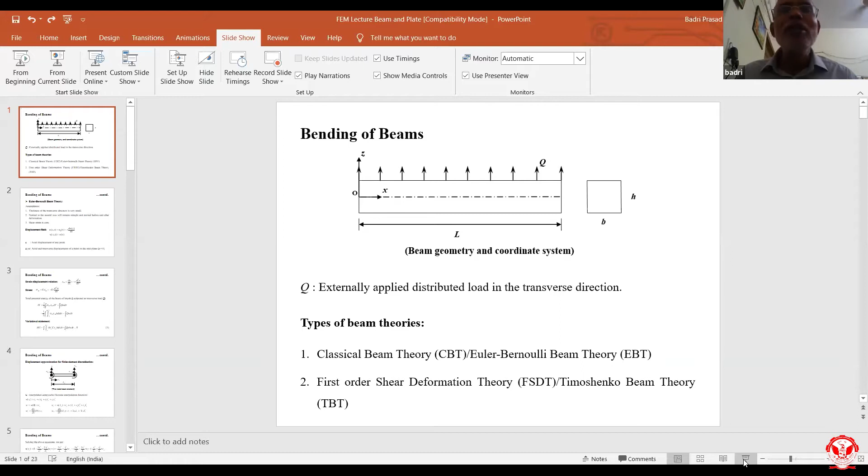Good morning to all the participants. Good morning, sir. I am going to talk about the finite element formulation of beams. That is the main topic I'm going to deliberate on. If you see this slide, my slides are visible. Yes, sir.

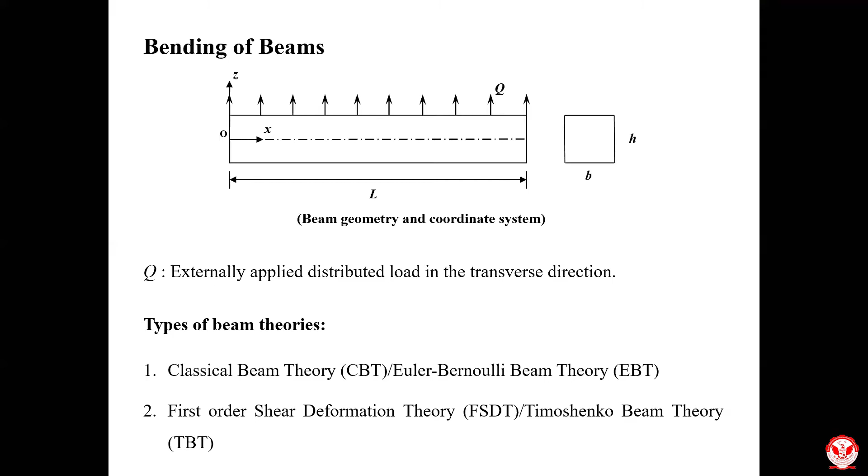What you see here is a beam, and you see the coordinate axes are marked X and Z. The length is L and the cross section shown is rectangular, although the cross section can be of any shape: circular, hollow circular, I section, or triangular. And in the Z direction, this is load Q. So for the finite element formulation of beams, first we need to look at beam theories.

Typically one is classical beam theory, also known as Euler-Bernoulli beam theory. The assumptions of Euler-Bernoulli theory are applicable if the length to cross-sectional height ratio, L by H, shown in the diagram, is greater than 30. In vibration problems, because the beam vibrates in different modes, there is the concept of wavelength. For vibration problems, if the wavelength to thickness ratio is greater than 30, then Euler-Bernoulli beam theory would be applicable.

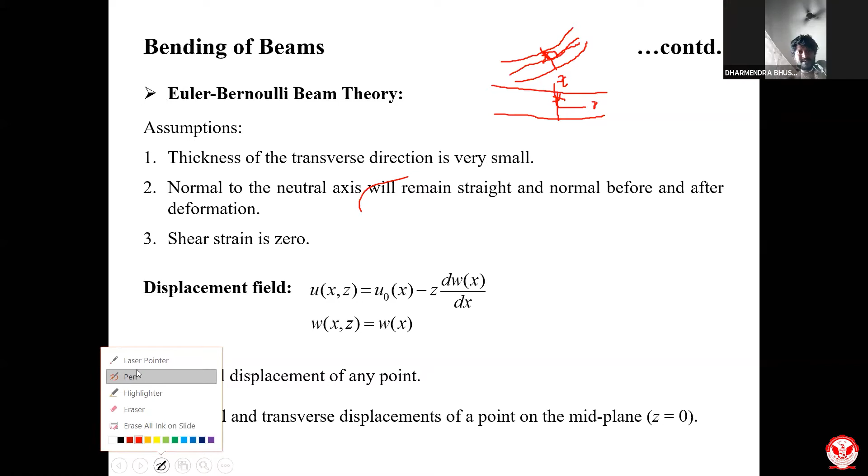Now based on this, if I take any point at a location z, say over here, at a distance z, that point goes to this location. As you see, this point moves along the x direction and also along the z direction. If you see the displacement given here, u(x,z) is equal to u naught of x minus z into dw by dx. What happens is that this line rotates by an angle dw by dx. So the displacement of this line from the center point, if I take this line here, this distance is minus z into dw by dx, because the slope of this line is dw by dx. That is how the displacement along x direction is u naught of x minus z into dw by dx.

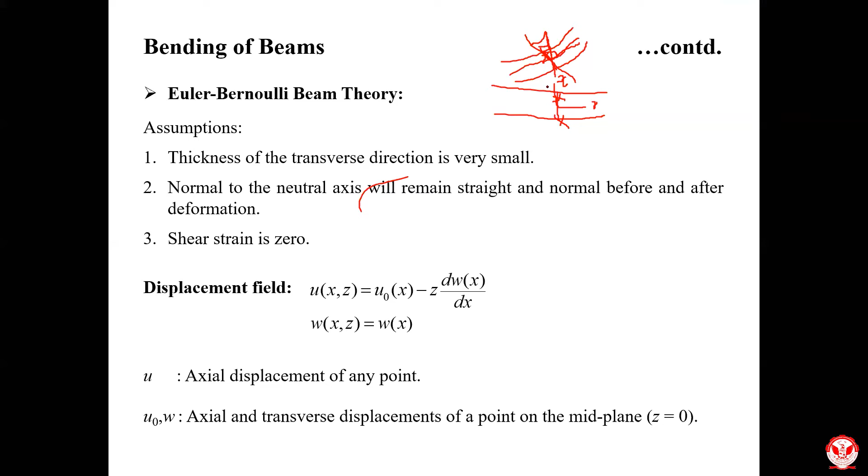Another assumption is about the displacement in the z direction, that is, along the thickness direction. It varies only along x, so if I measure the deflection at the bottom point or at the top point, it remains the same. It is independent of z and is only a function of x. Now another special case is that the beam is subjected to only transverse load, which was shown in this slide. In that case you will find that u naught of x is going to be 0. For small deformations, this point initially is here, and the other point is at the same x location. The x coordinate of the point on the center line does not change. That is how u naught of x would be 0.

Therefore the displacement along x direction would be minus z into dw by dx, and w is the displacement along the z direction, the transverse direction. So u is the displacement along x direction here, and w is the displacement along z direction. As already explained here, u is the axial displacement of any point, and u naught and w are the axial and transverse displacement of the point on the mid plane.

Now the next concept we look at is the strain. If you look at here, it is a one-dimensional problem, so the independent component of strain is only one, that is the normal strain epsilon xx. This strain epsilon xx is, if you take a line element parallel to the x-axis and look at its change in length per unit original length, the gradient of u along x, du by dx. And we have written u as minus z into dw by dx. So epsilon xx comes out as minus z into d2w by dx squared. This is the expression for normal strain in the beam along x direction in terms of transverse displacement w.

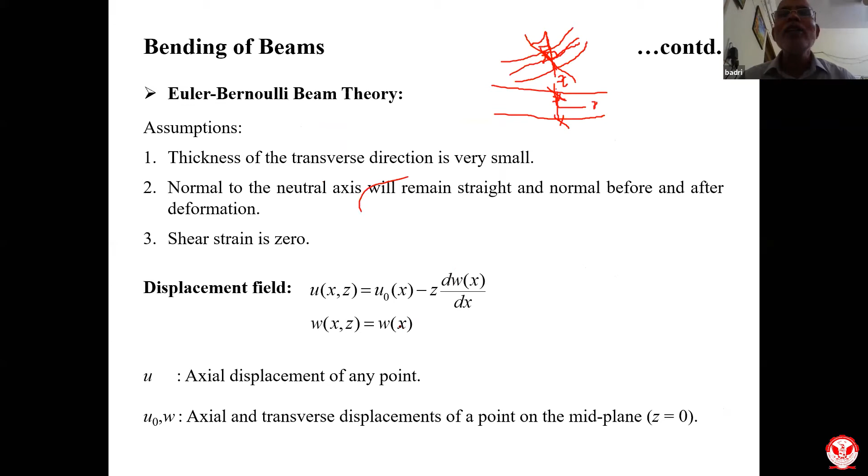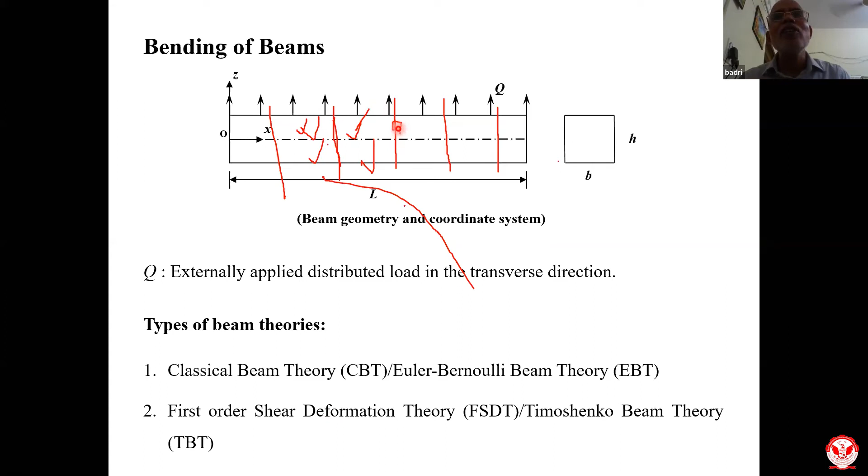Now we do one more thing in this expression. If you substitute epsilon xx as minus z into d2w by dx square and carry out the integration with respect to the thickness coordinate, that is the z coordinate, from minus h by 2 to plus h by 2, you will have a term E z square b dz. So z square is the distance of a differential element from the y axis, and b into dz is the area. So that integration can be written as the second moment of area, that is, the area moment of inertia.

So the expression for total potential energy can be written, when you substitute d2w by dx square as B into d, as follows. The first term is delta of epsilon xx transpose. If you want to take delta of this expression, B is a known quantity, and dE, the vector of elemental degrees of freedom, is an unknown quantity. So its variation would be B into delta d. So if you substitute epsilon xx transpose, you get delta d transpose, and these are the values at node points, so independent of the x coordinate, and can be taken out of the integration sign. So you get here B transpose E into I, the area moment of inertia, into B dx

into dE. You would notice another thing here, that the quantities which are matrices or vectors are denoted by bold letters. If you are writing on a piece of paper, you could use square brackets for enclosing a matrix and curly brackets for vectors. So here bold letters are used. This is the first part, the strain energy part of the total potential energy expression, minus the potential energy of the external forces, equal to 0.

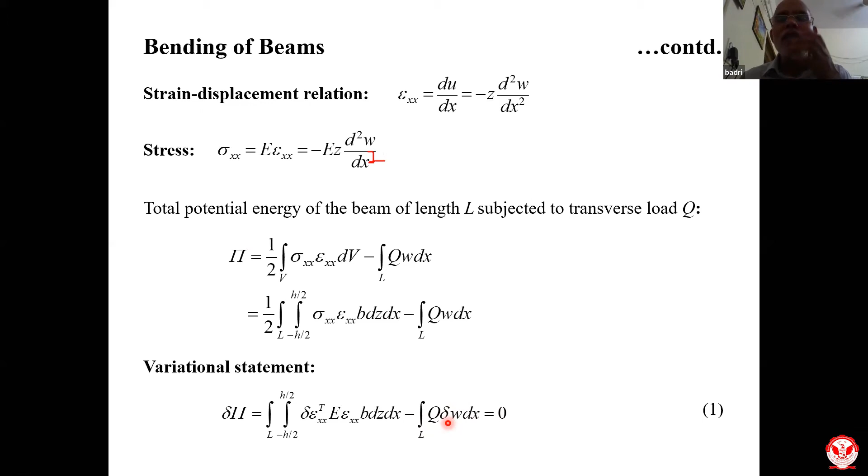So it is equated. The second term, because the whole thing is equal to 0, is taken to the right hand side, and it is q into delta w, and w here is h into dE. So w transpose would be d transpose into h transpose, and when we take delta of that, it would be delta d transpose into h transpose. So that is how this is written as delta d transpose, integration over the length of the element, q is the distributed load, h transpose into dxE.

And now, since delta d is arbitrary, we enforce another condition as per the principle of stationary potential energy. The first variation of the potential energy should be 0 for arbitrary variation in the displacement.

So this is arbitrary. So the coefficient of delta D from the left side and right side must be equal to 0. And that gives you what is known as the element level governing equation, which is written here. So finally you get the element level governing equation as B transpose into EI into B into DXE into D. This is arbitrary, so we are equating its coefficient. So other things remain here. So this whole term is equal to the coefficient of delta D transpose on the right hand side,

so it is equal to this. And now this part, integration 0 to LE B transpose EI B DXE, is known as the element level stiffness matrix, and this integral on the right hand side is denoted as the element level load vector. So are there any questions so far?

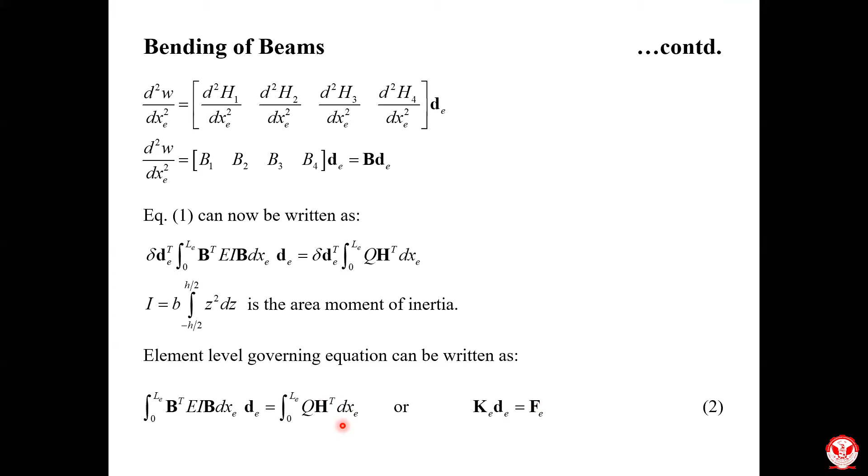Okay. Are there any other questions? Yeah, so if there are no questions, we proceed further.

So ultimately when you are solving problems using beam finite element, the element level governing equation is important. But of course, to understand the assumptions behind that, and what we mean by degrees of freedom and why these degrees of freedom, you need to know this basic theory. Now B is the second derivative of the shape functions h1, h2, h3 and h4. These four shape functions are defined here. So we take the second derivatives of these, and when we take the second derivative, we get this matrix B.

Although I did not tell you another thing, why I denoted this as a matrix and this as a vector. This is a general notation. In more involved problems where there is more than one variable, here there is only one variable W, that is the transverse displacement of the beam. So this is just a row vector. But if there are more unknowns or variables, this will become a rectangular matrix. That is why I have used the notation matrix for this. And irrespective of the problem type, this will always be a column vector. So that is why I have denoted this as a vector.

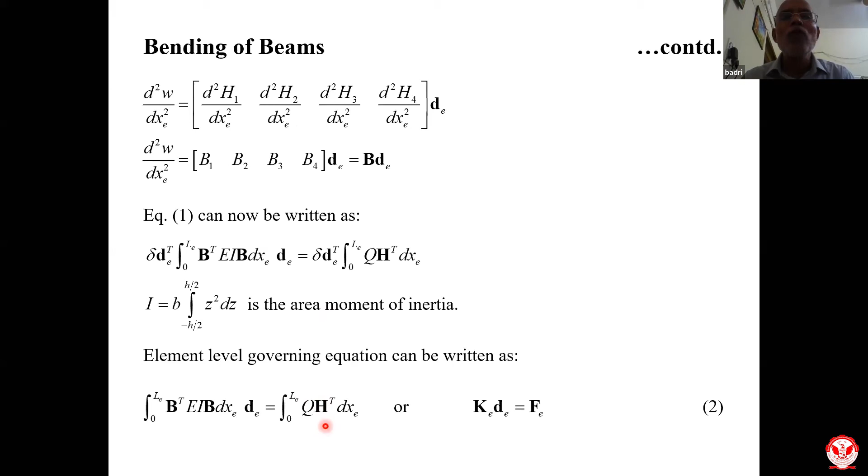Similarly, here H transpose, H was this. This is your H, which in this case is a row vector of size 1 by 4. When you take the transpose, it becomes 4 by 1, and carry out the integration with respect to XE, you will get a vector of 4 by 1, and that is nothing but your FE. So if you carry out these integrations, this is the form of stiffness matrix you get. So a 4 by 4 matrix, EI is outside, that means it is multiplied to all the terms here, like 12 upon LE cube. So after the integration, you get these. These are the elemental degrees of freedom. This side is the load vector. Now you see the load is a transverse load.

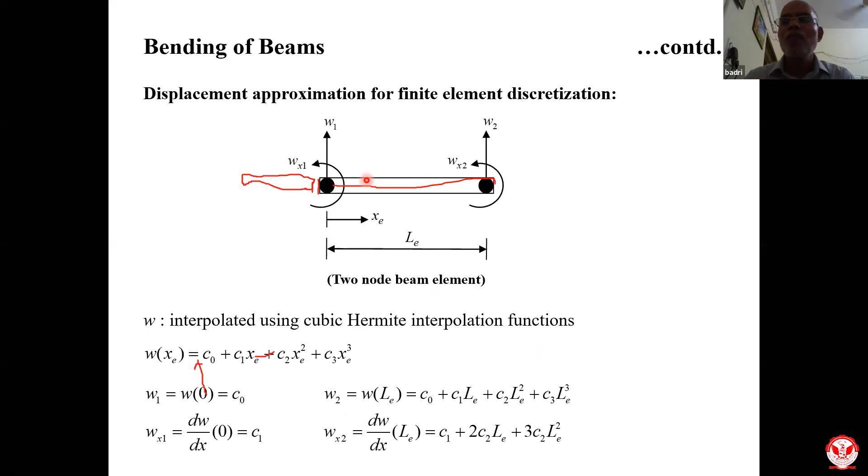So if you look at one beam element, that is this particular beam element, and there is, let's say, a uniformly distributed load on it. The total load acting on this beam is going to be Q times LE. In the load vector FE on the right-hand side, you have Q LE by 2, and the third row is also Q LE by 2. So this is exactly half of the total load acting on the beam.

But because we derived this load vector using the shape functions, we are getting these additional terms. This is actually a moment. Now, from here onwards, for the analysis of beams, there are two approaches. One is known as the lumped load vector, and another is the consistent load vector.

So in case of lumped load vector, yeah, somebody is asking a question. Yes, please. Yes, hello.

So this is a lumped load. If you use these two terms, with the second term here being 0, then it is a lumped load vector. If you consider it as it is, then it is a consistent load vector. We call this the element level governing equation. The assumption is that EI is constant within the element and Q is constant within the element. That is how this integration is performed.

Now, this is just the element level governing equation for a static problem. For vibration, you also need to consider kinetic energy, so we introduce another quantity called the mass matrix. I have not shown that here. Then you want to see how this element can be used to solve problems of bending of beams, and so I have shown an example here.

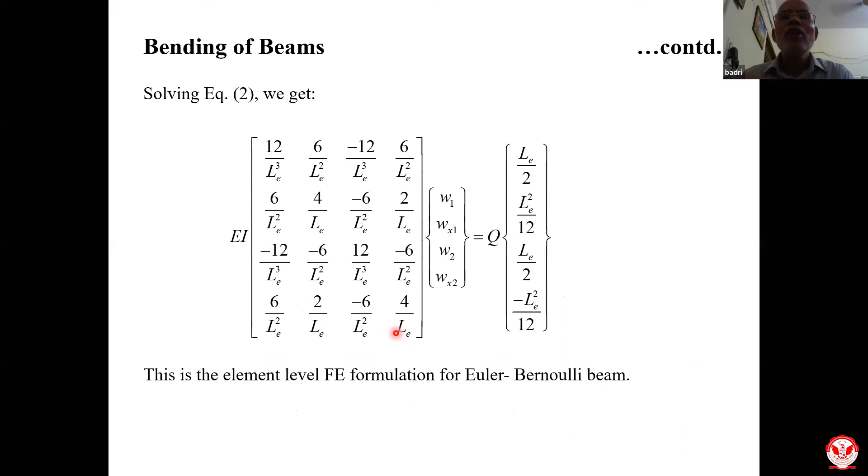Now, there are some properties of this stiffness matrix. When we talk of the element level stiffness matrix, it is a singular matrix. That means if you find the determinant of this matrix, it would be 0. It is not invertible. Similarly, because this global stiffness matrix is obtained from the element level stiffness matrices, it is also singular. It cannot be inverted, and its determinant is going to be 0. So we cannot solve these equations at this level. We first have to impose the boundary conditions, and then after imposing them, we solve these equations.

So now the next thing is the boundary conditions. Let me say that this beam is a fixed beam. In your strength of materials or solid mechanics, you might have analyzed a fixed beam using the 3-moment method, Clapeyron's 3-moment theorem. Fixed means it is not allowed to move in the transverse direction, so W1 would be 0. It is not allowed to rotate, rotation of the cross section is not allowed, so Wx1 would be 0. Similarly, at this end, the deflection is 0 and the cross section is not allowed to rotate, so W3 would be 0.

So if you put W1, Wx1, W3 and Wx3 equal to 0 in these equations, we are left with only two unknowns, that is W2 and Wx2, for the center node. We have to solve for these unknowns. For that, we consider equations number 3 and 4, because W2 is the third variable and Wx2 is the fourth variable in the vector of unknowns. In that, this contribution will go because it is multiplied with W1, and W1 is 0. This is multiplied with Wx1, and Wx1 is 0, so this contribution goes too.

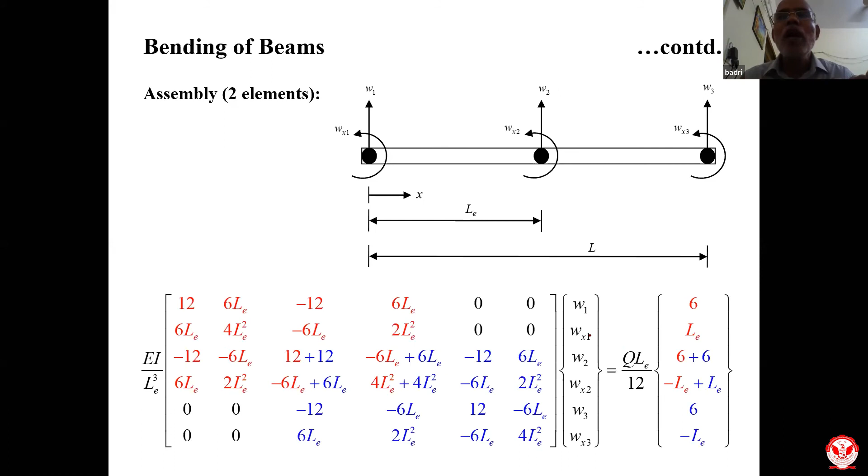If you look at the finite element, here the degrees of freedom are only W and Wx. So I am talking of the boundary condition only in terms of W and dW by dx, which is denoted as Wx. If you are solving a fourth order differential equation using an integration approach, then there would be an additional boundary condition. Here the bending moment would be 0, so d2w by dx square would be 0. Here also d2w by dx square would be 0.

This is the clamped case. I have already explained it while explaining how to solve the problem. If you have a clamp, this side is fixed, so that means this end is fixed. And this side is simply supported, so this is resting on, say, a circular body which is supported on the ground like that. In that case, on the fixed side the deflection and its slope would be 0. And you can use any number of elements in between. These are the boundary conditions only at the ends.

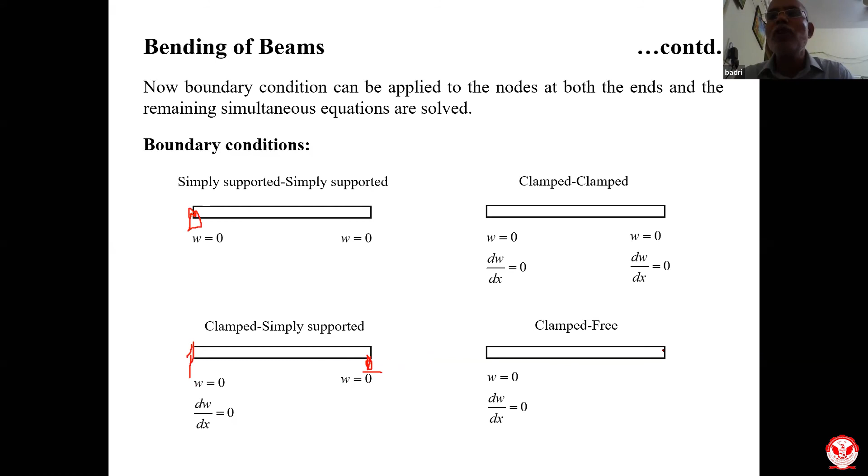W is equal to 0 here. And of course, for a fourth order differential equation, here d2w by dx square will also be 0, but it is not required in finite element simulation. Similarly, the clamp free case, you can correlate. In case of clamp free, both w and dw by dx are unknown quantities at the free end. So in terms of finite element, there are no boundary conditions in terms of that.

I think I have already taken 1 hour. I also wanted to talk about Timoshenko beam theory, but since the time is over, I would like to stop. Sir, should I continue or should I stop? I think 1 hour is enough. You must be tired by now. Or if it is over, then it is very good.

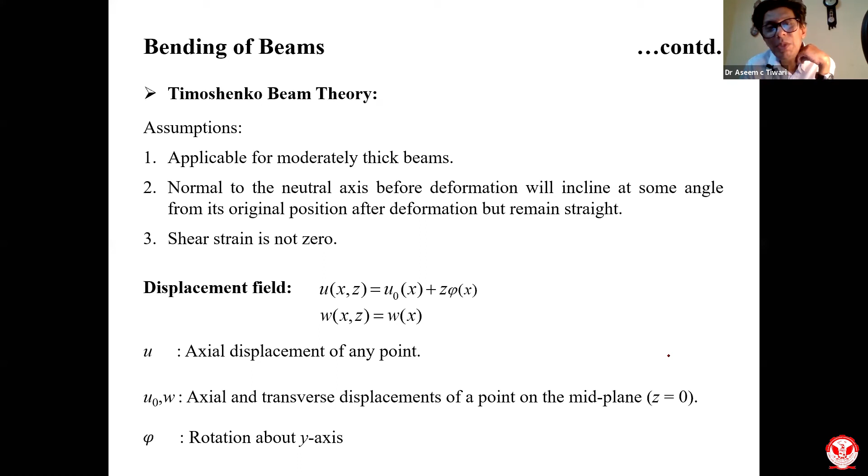If you want to sum up everything, you can continue for 2-3 minutes. I think I have this formulation for Timoshenko beam, but it will take time. So I will finally only come to this slide.

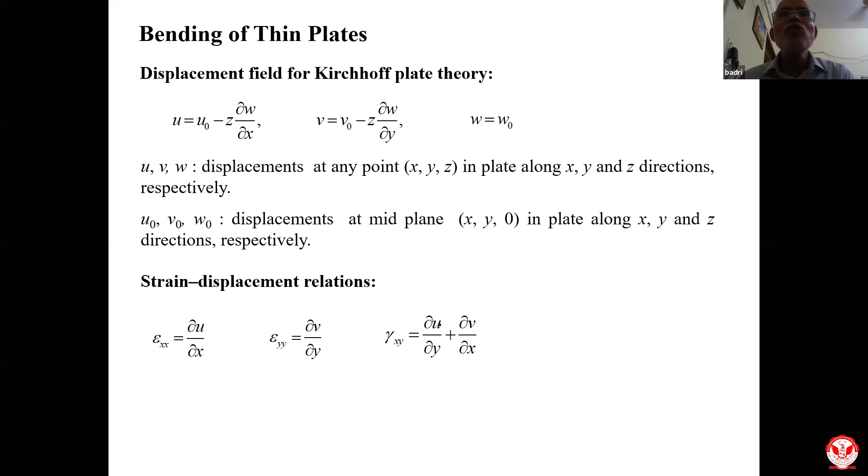Then you have to talk of 3 non-zero independent components of strain, 2 normal strains and 1 shear strain. So this is normal strain along X direction, normal strain along Y direction, and shear strain, that is, if you take 2 line elements parallel to X and Y, their change in angle is your shear strain. Based on this, you write the expressions for strain, then the expression for total potential energy. In case of beam, you had only these terms. In case of plate, you will have these 3 terms.

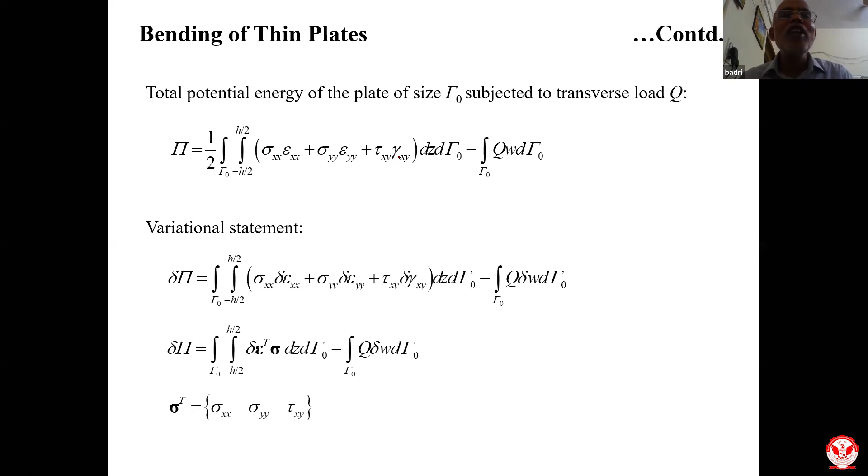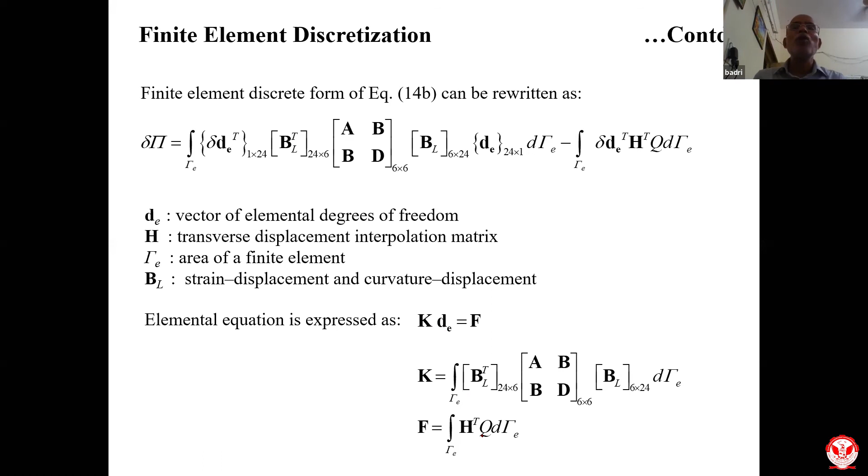And then the relationship between stress and strain, assuming that thickness direction normal stress is 0, so we use what is known as plane stress condition and linear elastic isotropic material. So this will be the constitutive relation, and then you develop the element level governing equation from this, and finally you have KeDe equal to Fe, where Ke and Fe are defined like this, and then you assemble, impose the boundary condition, and then you can solve the problem. So this is how the Kirchhoff plate problem would be handled. I have briefly explained what it involves.

Yes, sir. Thank you, sir. Very good presentation, sir, and very helpful. Good, thank you.

Thank you. I know this is a topic which I teach in 2 to 3 lectures. So now I have condensed it into 1 lecture. So I think maybe I have been brief at many places. So if you have not followed, you can ask questions on those.

Okay, that was a very knowledge giving and motivating presentation, and it has agitated the minds of all the participants, and we look forward to more enlightening lectures from your side in future. Whenever you are free, we will catch hold of you, and we will arrange webinars, because digitalization has many negative points, but at the same time it has positive points also, like we don't have to travel, and we don't have to waste our energy, and the unnecessary fatigue of traveling is not there. We can sit quietly in our house and communicate our knowledge to others by the digital mode. So thank you very much once again from the mechanical engineering department, and we look forward to more lectures from your side in future.